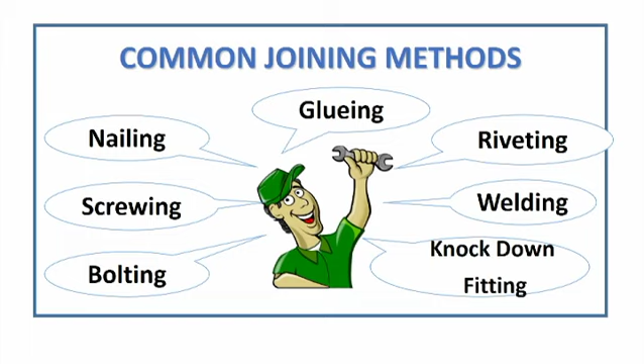Today we are going to have a look at riveting. In this day of power glue and bolts and nuts, why use rivets? Rivets offer a number of advantages over threaded bolts. They won't loosen when subjected to vibration and can secure joints with short clamp length. You will actually be surprised at the extent of use of rivets and their strength.

Rivets have been around as early as 3000 BC. They first appeared in Egypt, where wooden rivets were used to manufacture several types of tool. In the 7th and 8th centuries, the Vikings installed planking on their boats using wooden rivets. At the start of the 19th century, there was a breakthrough in the iron and steel industry, and this triggered and symbolized the start of a new era, the joining era. Rivets started to be made in metal.

Traditionally, riveting is carried out by a team of 4 men. A more modern version uses an air hammer.

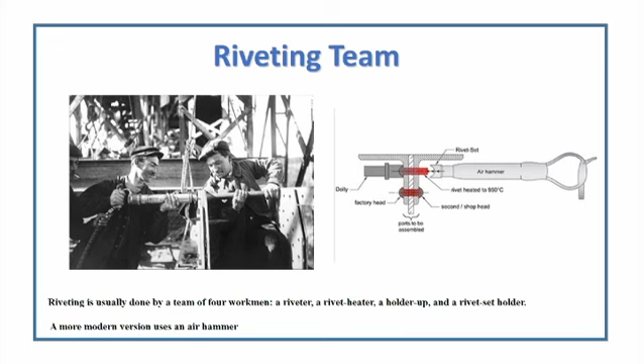Here we see the Titanic during her construction with the riveted hull plates of her stern visible. You will find it interesting to note that the hull plates were fastened on all sides to the ship's main structure by thousands of rivets. These rivets were made of wrought iron.

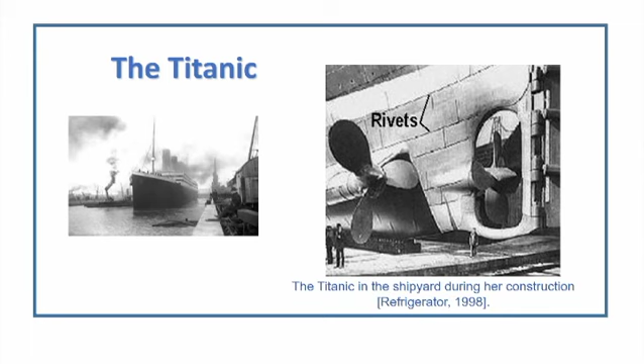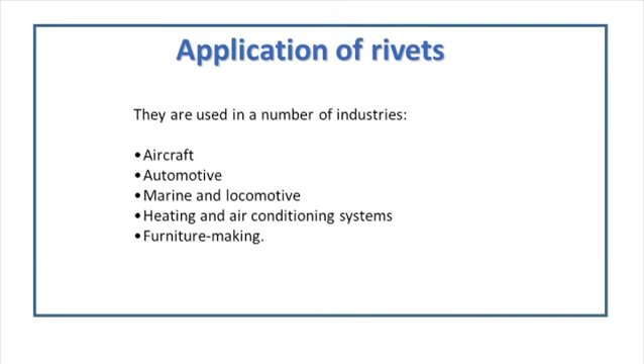Rivets have evolved a lot since the Titanic. They are used in a number of industries, including aircraft, automotive, marine, locomotive, as well as heating and air conditioning systems, even furniture making. Here, brass rivets have been used in a castle door in Spain.

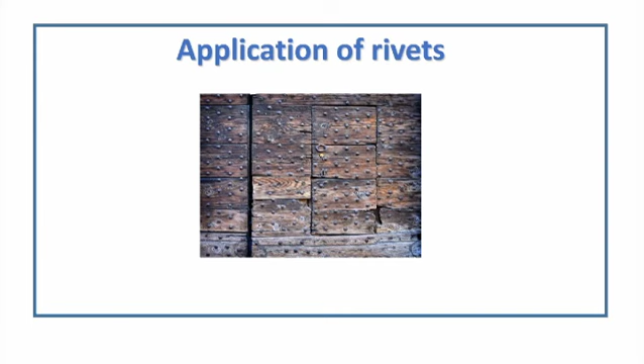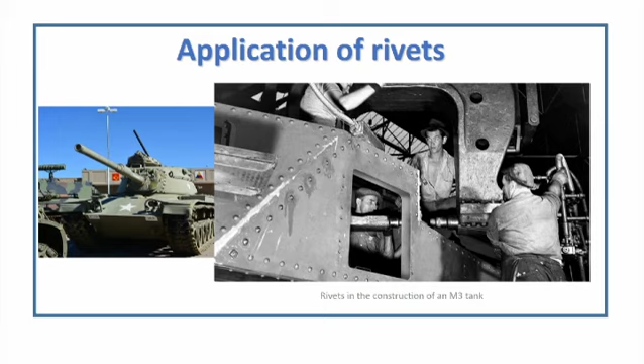The rivet is critical to airplane construction. These rivets are made from lightweight aluminium. The flush rivet was first used in the H-1 racer, which first flew in 1935.

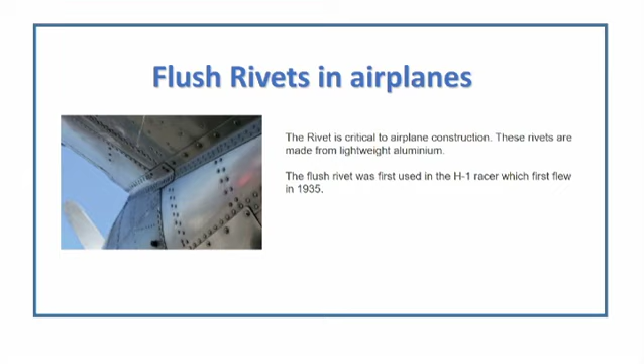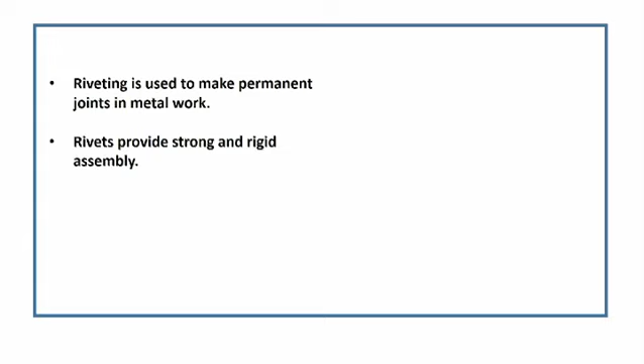Riveting is used to make permanent joints in metalwork. Rivets provide strong and rigid assembly. The different components of a rivet are the rivet head, the rivet pin, and the rivet end.

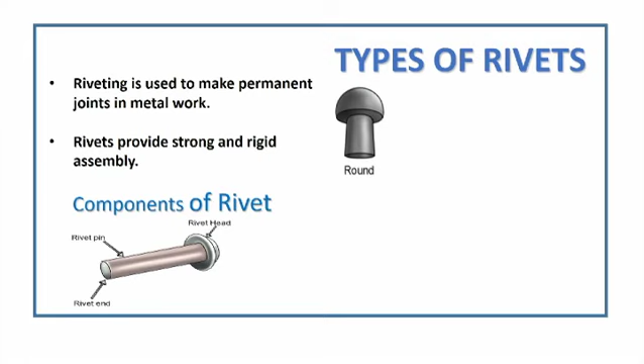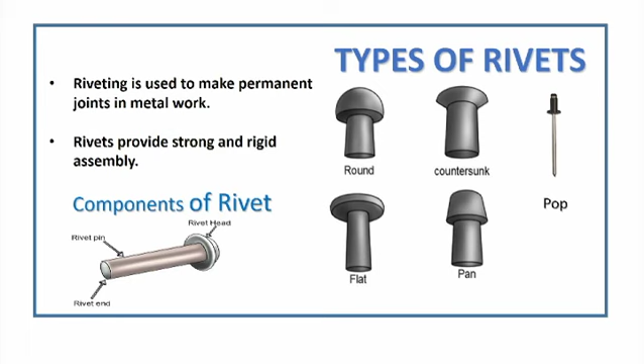Rivets, like screws, are classified according to the shape of their heads. The different types of rivets are the round head rivet or snap head rivet, the flat head rivet, the countersunk rivet, and the pan head rivet. The more commonly and widely used rivet nowadays is the pop rivet, which usually has a flat head.

Let us have a look at the types of rivets. The round head rivet is a widely used type of rivet in general plate metalwork. Examples of its uses are to connect railways, traditional boiler making, shipbuilding, and bridge girder construction.

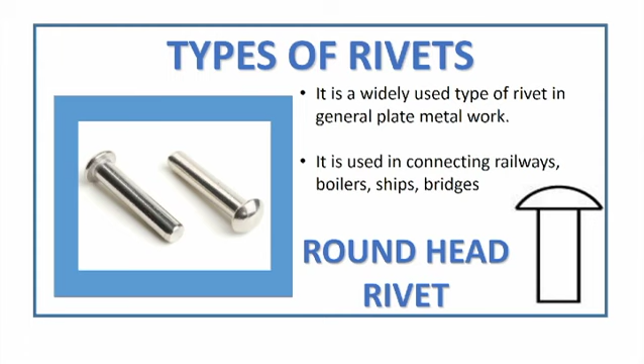The flat head rivet is commonly used in joining thin plates. It is used, amongst others, to make buckets or tin cans. The countersunk head rivet is used where a flush or flat surface is needed. Some of its uses are to assemble water tanks and aircraft bodies.

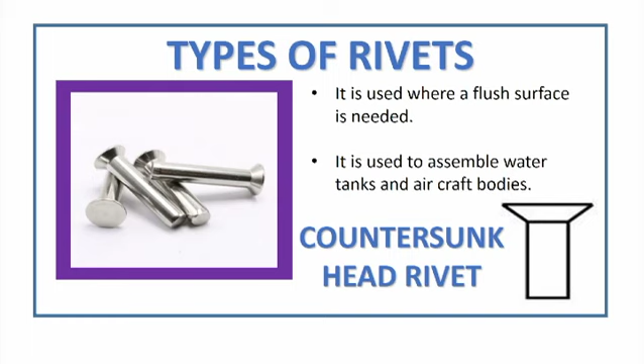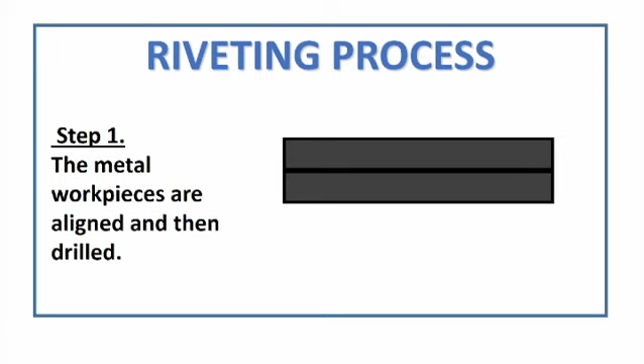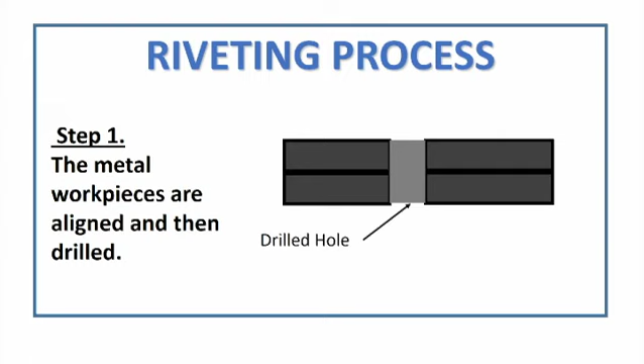Now we'll look at the riveting process. The first step is to align the metal workpieces together. Then a hole is drilled to the appropriate size. One important tool in riveting is the combined rivet set and snap.

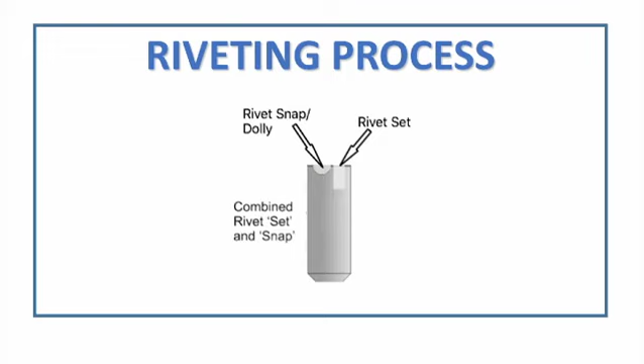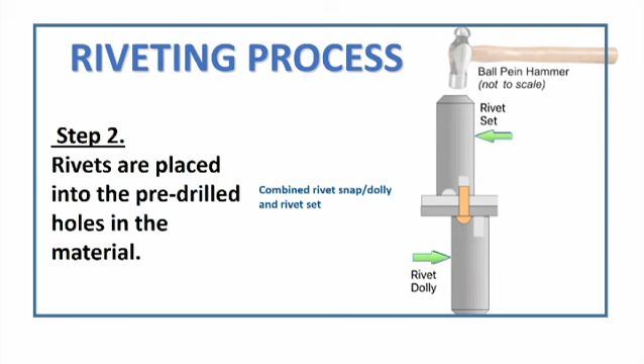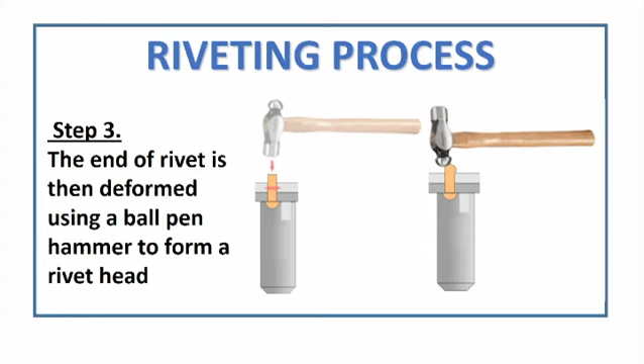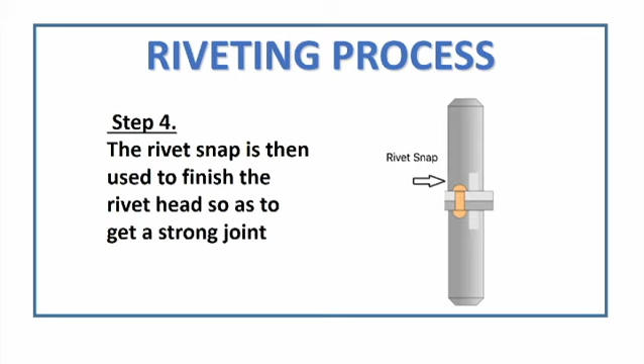Step 2: the rivet set presses the metal in place from above. Step 3: the end of the rivet is then deformed using a ball peen hammer. Its rounded end is used to get a rounded rivet head or snap head. Step 4: the rivet snap is then used to finish the rivet head to a perfect round shape so as to get a strong joint.

These are the rivets that we commonly see on the market nowadays. It is the pop rivet and is used to access the joint when it is available from only one side. It is used to join thin metal or plastic sheets together.

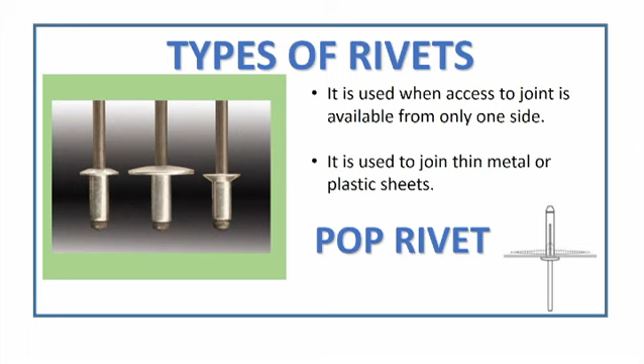The pop riveting process is as such. The pop rivet plier is used to pull the pin of the rivet. This deforms the rivet body by tightening the two joining pieces. Eventually, the pin snaps off.

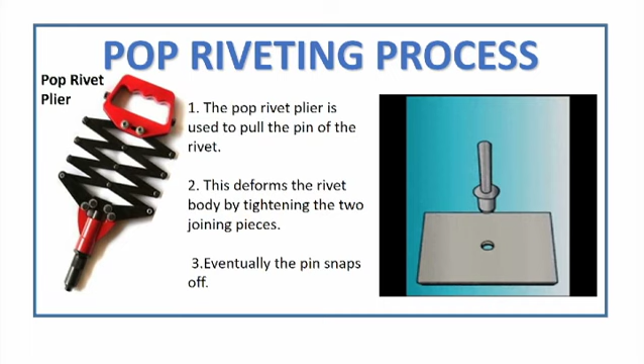Do you think you can now identify the types of rivets in bridge construction? Of course, it is the round head rivet.